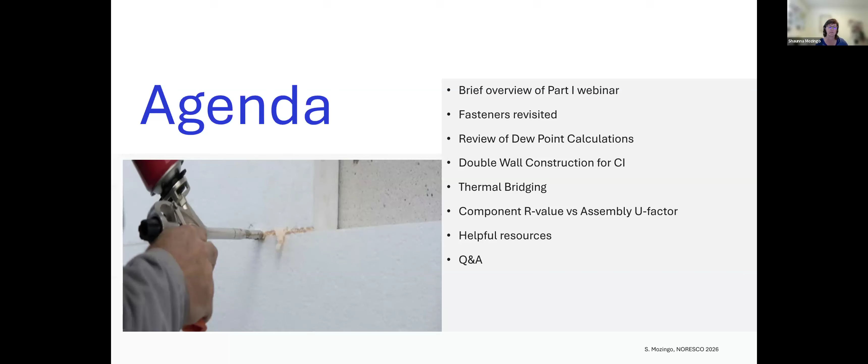Let's get just a review, right? A review of last webinar, part 1. We're not going to go into too much detail on this. This is what you can look forward to in part 1 if you haven't seen that one yet. It's just why continuous insulation. And as I say continuous insulation, I just don't want you to picture in your head rigid foam board. That's one way of doing continuous insulation. There's a lot of different continuous insulation. I'm not here to support one industry, right? I'm just talking about continuous insulation as a code requirement and as a code option.

So definitely energy efficiency. We can see the energy efficiency, the thermal bridging that takes place, the thermal benefits, holding the heat inside the house if we're trying to heat the house, keeping the heat outside the house if we're trying to cool the house.

Right, code compliance, whether we are doing a prescriptive R20+5 or if we're doing a trade-off path where we're going to get more benefit for having that continuous insulation on the outside or the inside of the wall. Thermal bridging, we're going to talk about in some more pretty good detail today because that was requested. So I'll just leave that up there. Reduce moisture damage, improve building durability. We're going to talk about that as we get into vapor and dew point and that sort of thing.

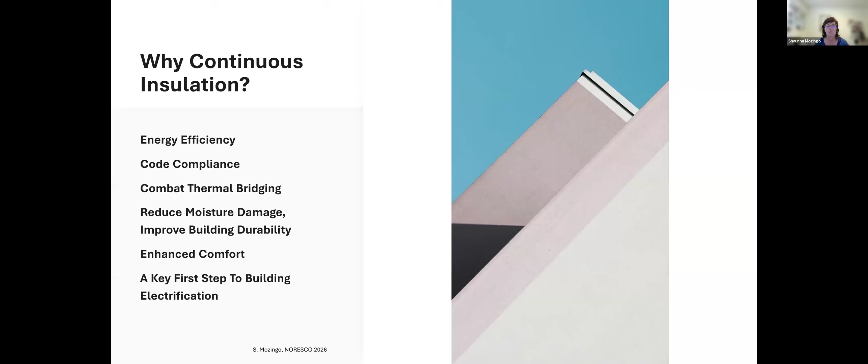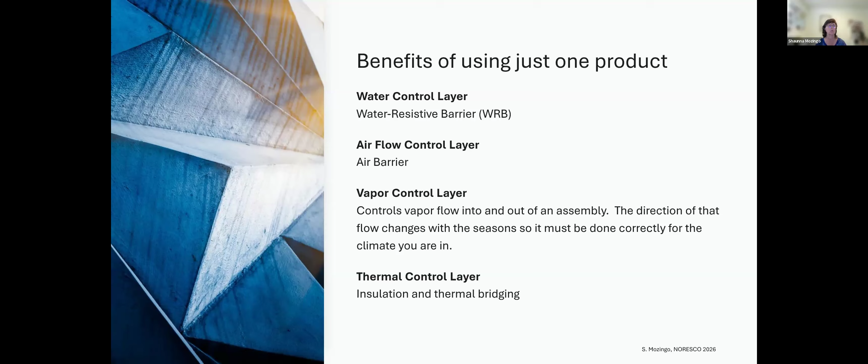So those are some things that we touched on in the first. The second is this idea of using one product or one thing for multiple benefits, right? This is more in line with rigid foam board type of materials, but you can have one product be your water control layer, your water resistive barrier, your air barrier, your vapor control layer, and your thermal control layer, doing that insulation and thermal bridging. So we talked a lot about that, and I like to bring that back around because a lot of people say the cost of continuous insulation is too much, but when it can take the place of 4 different things, you have one product that's serving 4 purposes, if installed correctly, of course, then maybe that takes away some of that cost conversation.

I also wanted to bring this back. We talked about all the different kinds of continuous insulation, and somebody had submitted a comment that I had my R values incorrect. So for XPS, the extruded polystyrene, it's R5 per inch, EPS at 4.6. I had all of these R values listed, and somebody said maybe check them out. I went back to each of the manufacturers and to the different products, and these are the values that I'm finding consistently. So I would love to hear from you if you're seeing something different than an R5 per inch in XPS average. This is about an R4.6 per inch in EPS, and about an R5 in the GPS, polyiso 6.5 to 7, and then 3 to 4.3 in mineral wool.

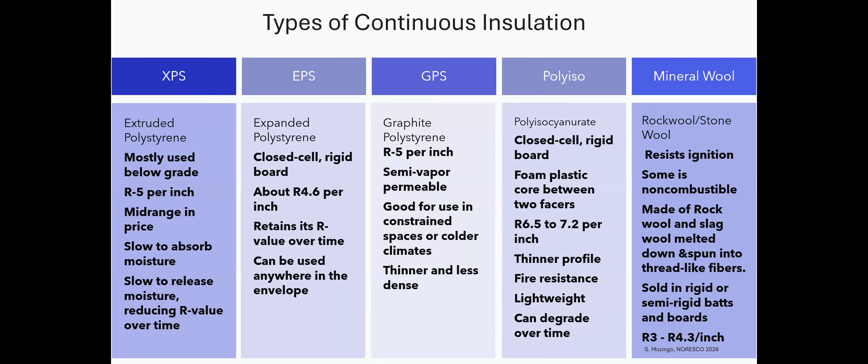Yeah, that's great. So remember, and I didn't go through these in detail this time because it is in part 1, but so there are some problems like when you talk about XPS and then I think it is GPS, where it's slow to release moisture. So it works really good for a while, but it holds its moisture and it's slow to release it. So it degrades over time. And what we're finding is that the manufacturer warranties don't last as long. And so they won't warranty for 100% of the R value over time. They reduce it, they decrease it over time.

So that's for XPS. EPS, though, retains its R value over time. So if you're seeing EPS in the foundations, that's great, right? It does retain its R value over time, and it can be used anywhere in the envelope. So I think if you're seeing EPS, that's a good insulation to see. I'm sorry if in the first one I said EPS didn't, because it's mostly XPS and GPS that sometimes lose their value over time.

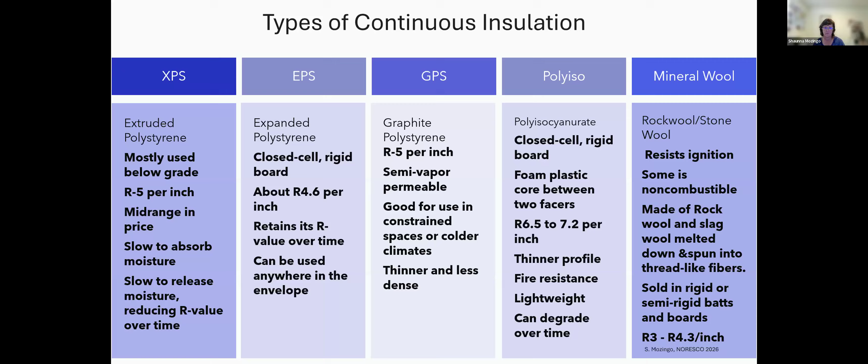All right, so some other ways of continuous insulation, double walls. We're going to talk about that because we had a couple people ask for double wall requirements. So we're going to look at that.

Batts, yes, you can have batts be continuous insulation. Remember, it's not the type of material, it's how it's installed. You can have a batt hung on a wall continuously, like you see a lot in basements, right? Or sometimes in crawl space walls. And so that would be a continuous insulation of a batt versus a cavity insulation where it's installed between two framing members. So, yes, you can have batts done.

Spray foam, a little bit harder because you're going to have a cavity, at least you're going to fill the cavity with the spray foam. And then in order for it to be continuous, you would have to go over the top of that framing. And that's going to be a little bit harder to do, especially if you're trying to close something in. So spray foam is probably one of the insulations that I don't see used continuously in a lot of places, maybe in an attic.

Wood fiber board, we're starting to see some of that as we get into more sustainable types of construction, where it's just taking these wood fibers, these chips that are left over from lumber production, and refining them into a fiber, adding some borate, which makes it a flame retardant, resistant to mold, mildew, those kinds of things. So we might start seeing a little bit more of that.

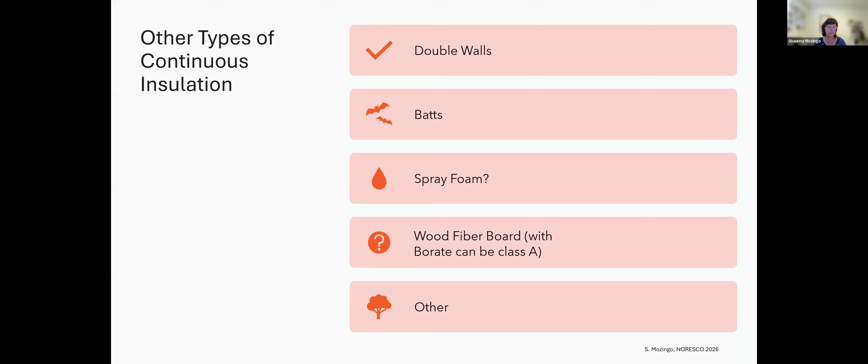And then what are some other things? Some other things might be SIPs, right? Structural insulated panel wall construction. We can see that sometimes used as continuous insulation values. We can also see insulated concrete forms where we have the insulation and then pour the concrete in between, but with some plastic, usually plastic or less thermal bridging type material used in there. And so you can have continuous insulation. There's a lot of ways to do continuous insulation.

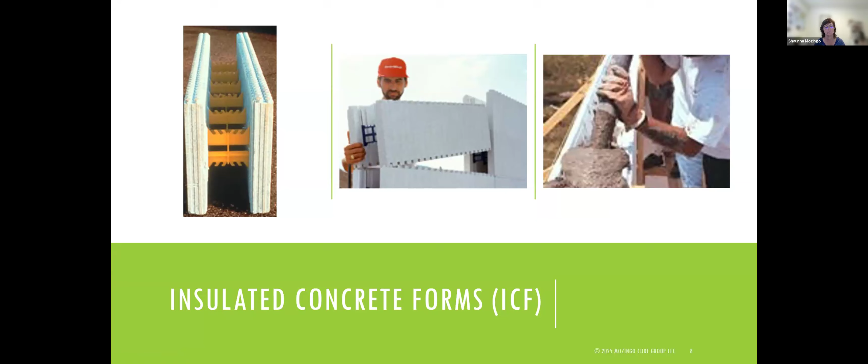One of the problems that I see often is when people say, well, I don't want to do continuous insulation, mostly thinking of rigid foam board, right? On the exterior, I don't like all those details, it's hard to install. There's some things out there I just want to remind you of. In the 2024 IRC, the residential code, Jay Crandall, a consultant who worked for a lot of people, he and the American Chemistry Council got together, and with somebody, Rob from DuPont, they put in this proposal that made it into the code.

It's in Appendix BN, which is this extended plate wall construction. Even Jay will tell you there are a couple things we need to work out, but it was a good place to start to give you the idea of how you could construct a house with continuous insulation.

So basically this concept: you have to have a double top plate. For sure it's limited to 2 stories, 1 and 2 family dwellings, townhouses, no more than 2 stories above grade, and seismic design category A and B. So there's some limits, but basically I have a 2x6 plate and a 2x4 wall, and then I have a couple inches of insulation. It's a 2x6 wall, but with only 2x4 construction and then the insulation.

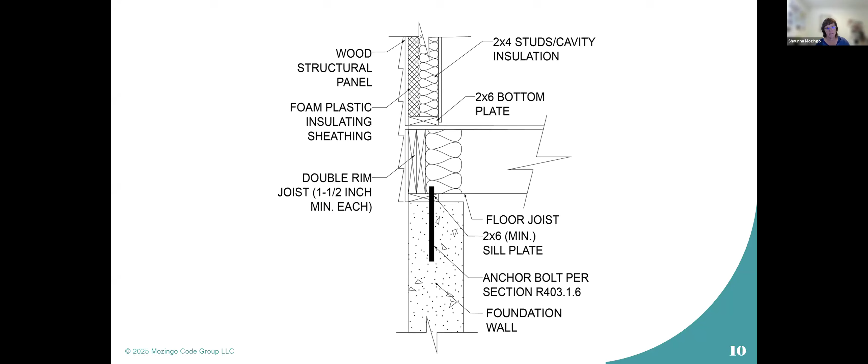The other question that came in was not necessarily a question, just a statement: can you go in a little more, can you cover the fasteners again? What's allowed and what's not allowed?

Well, you can pretty much do anything. It's just, can you call it continuous insulation after you're done? We look at the definition in the code of continuous insulation: it's insulating material that is continuous across all the structural members. So it's not in a cavity. You have framing and you install the insulation continuous over it or over the top of your concrete walls. It's continuous across all the members without thermal bridges other than fasteners and service openings. It's installed on the interior or the exterior.

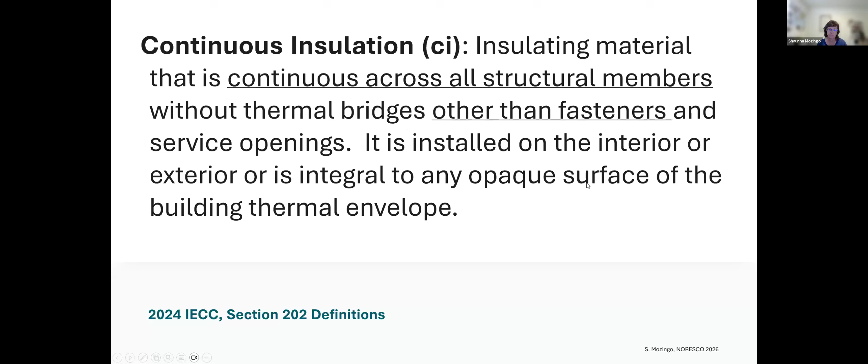So then we get into this: what is a fastener? A fastener is like this point thermal bridge. You might have some thermal bridging right here, but it's just a small point. Overall that gets calculated into the U factor of this wall when you put something into ResCheck or ComCheck, it's calculating the small thermal bridging effects of fasteners. So it's a nail or a screw or a clip or a bracket or maybe like this hat channel. I have this small thermal bridge here, whether I'm going through my cladding, through the insulation, into the framing. This is metal framing, just as an example. I'm going through something at a small point, it's not hugely continuous.

Or I have a hat channel in here where I have my insulation. I'm attaching my insulation to the framing. I put my channel up and even though this is metal, I have my cladding going into the metal, but I don't have a continuous bridge from the cladding all the way through to the insulation, because they're being connected at different points.

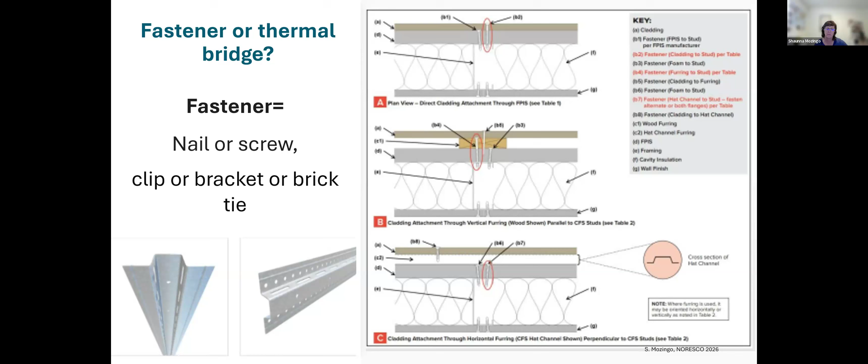So a fastener or a screw, while it is a point thermal bridge, is allowed when attaching your product and it can still be called continuous insulation because you're limiting the amount of that thermal bridge, versus something like this where you have a linear thermal bridge for cladding supports like these Z channels, that form this line all the way up and down the building. So now you have this linear thermal bridge: a continuous metal or wood furring that penetrates the exterior insulation layer, creating a cavity.

Something I just want to point out, which I didn't last time, is that a lot of times I get questions from people saying the jurisdiction turned me down for my ComCheck or my ResCheck because I used these Z channels, or whatever you want to call them. They're saying I can't count that. How do I do this in ResCheck or ComCheck? Well, you can't. If you're familiar with ResCheck, I just talked to Rob Salcido with PNNL this morning to make sure.

If you're familiar with those softwares, it allows you to enter a continuous or a cavity, but it doesn't allow you to enter two cavities or two continuouses, right? And so what you would have to do is call it other, if you had a cavity plus a continuous. If it was just cavity, if the only thing you were doing was this insulation on the outside of the building, then you would call it a cavity insulation and you'd just give it the R value for the cavity insulation.

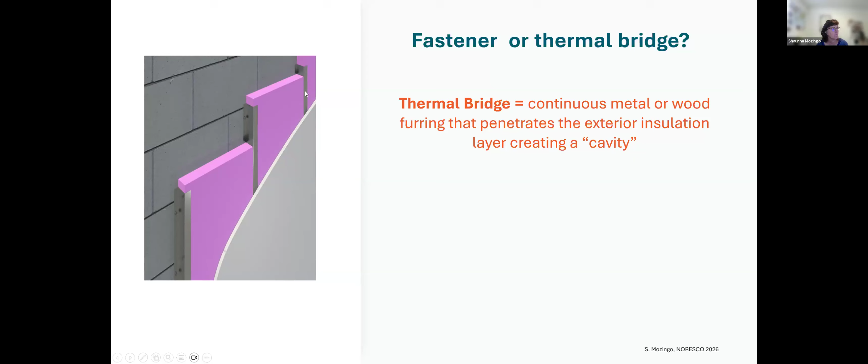So I think for now, if you're seeing this kind of insulation on the exterior of your wall where it's making a cavity, you would need to use other in ResCheck. Otherwise, just go performance; that would be your best bet.

All right, so also reminding you that the IBC does cover fasteners, telling you that Z-furring penetrating through exterior insulation makes it cavity insulation. It's not just an energy code thing. It's not just an insulation thing. The building code also talks about it. And there's more information at continuousinsulation.org, which, you know me, is one of my favorite websites. They have so much information there.

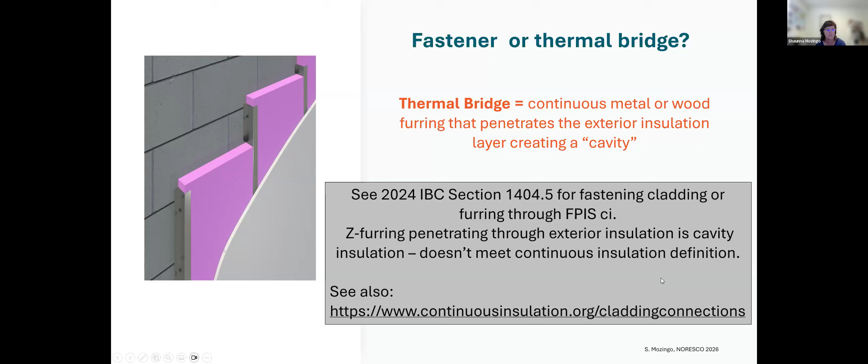So if you want a really detailed report that the foam sheathing folks put out on fasteners, there's this great report here. You can take a picture of this, or it'll be in the resources that I send out. They did a good detailed report on the different kinds of fasteners, the different kinds of thermal bridging that happens, how to calculate that into the U factor of your wall, and that sort of thing. I don't really have a ton of time to go into it.

All right. The other thing that I did find interesting was just a reminder about tapes. If we're going to use this one product, say a rigid foam board, as a continuous insulation and a water resistive barrier, air barrier, vapor barrier, all of the things that we want it to do, you have to seal all the joints and seams. And different manufacturers of different insulation call out different tapes or different things.

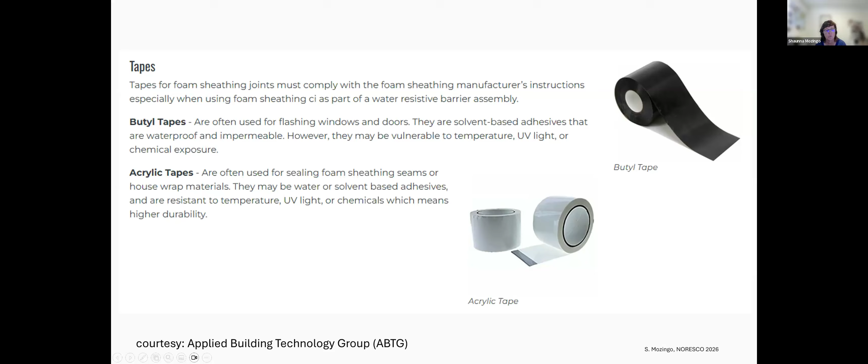I see a lot of black tape when I'm going around, and this is in that same report on the fasteners, but it was interesting to see that those butyl tapes are vulnerable to temperature, UV light, and chemical exposure. And so the better tape is acrylic tapes that are resistant to those things. So again, more information there, but just something to point out. Let's talk double walls real quick.

Double walls is a way of doing continuous insulation, right? So wherever we have wood, we have about R1 per inch. And so we put continuous insulation over the top of that to not have such thermal bridging right there, wherever the studs are. And so how do we combat that? Well, we can put that continuous insulation, or some people are not wanting to use continuous insulation for various reasons. And so some people will build double wall systems.

There's a couple different ways to do double wall systems. There's a bunch of different ways, actually. But one of the ways is to build, like, I have an interior structural wall, and so I build a secondary exterior structural wall. In this picture that I got at Building America Solution Centers, good resource, they have cavity insulation on the interior wall, cavity insulation on the exterior wall, but also a layer of rigid board or a layer of continuous insulation, right?

And so that continuous insulation is taking up the thermal bridging that would have happened between all of these wood studs. Or you could do it the opposite: you have your structural exterior wall and a non-structural interior wall, but you have a layer of continuous insulation in there. Another way to do it is to have your framing lined up so that you have double walls, but you offset them. There's a bunch of different ways to do it.

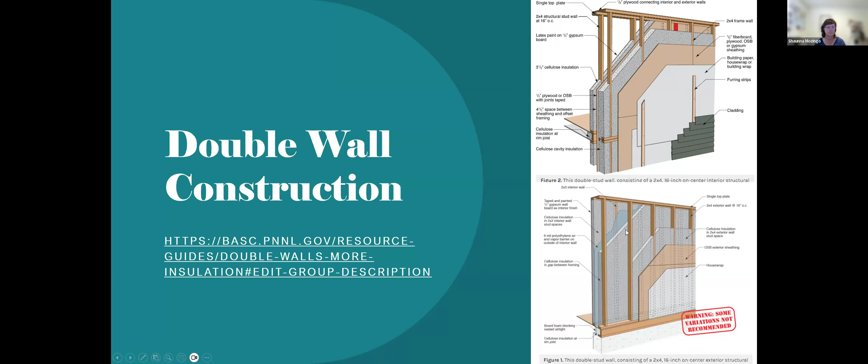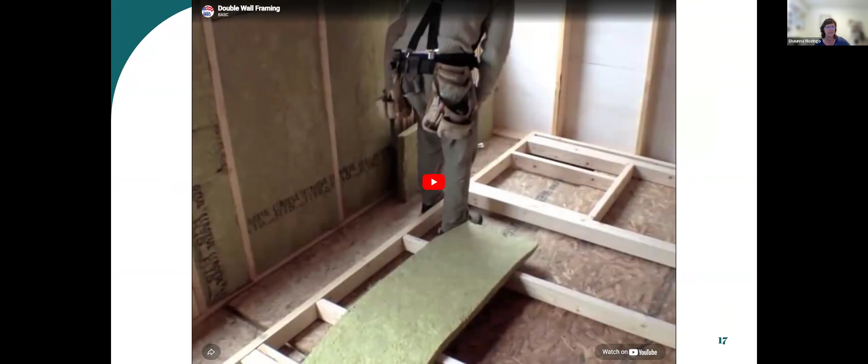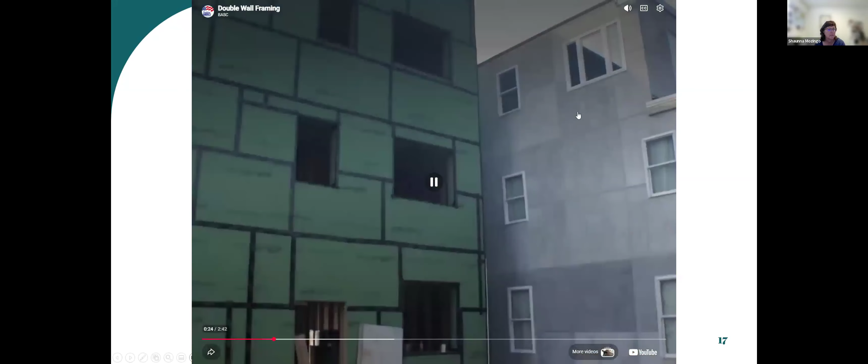I have this really amazing video that I'm going to play for it, but I don't think you're going to get sound. We were testing it earlier. Maybe I can talk to you a little bit about it. So this is a cool video from Building America that I found on Building America Solution Center with a good process of insulating. You can't hear this, right, Erica? I can't. Okay, that's fine. He's just explaining this double stud or double wall system that they're using, and I will narrate for you as we go through.

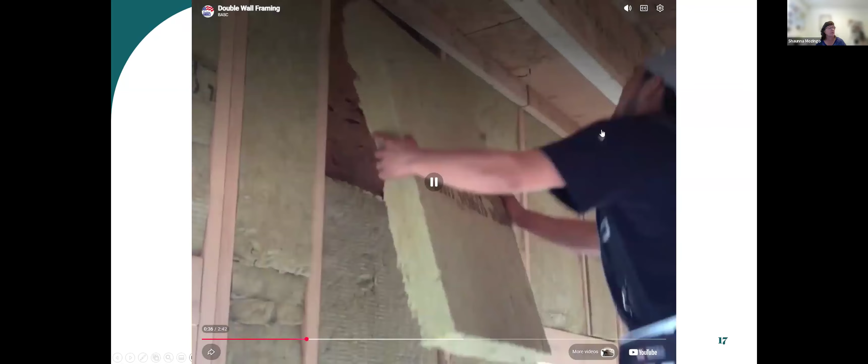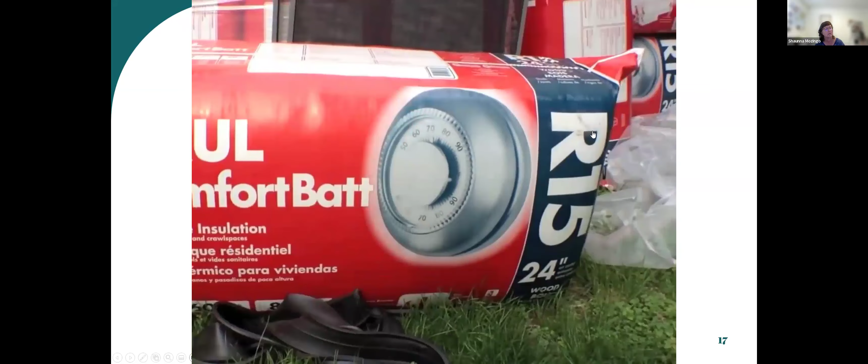So let me get inside the wall. There you go. So what they're doing is taking some rock wool insulation and insulating this exterior structural wall, insulating the cavities with rock wool, which is about an R15. This is an old video. Then they take a 2-inch thick layer of rock wool and add it continuously on the inside of that wall. So now you have a cavity plus a continuous insulation, and so you break up all that thermal bridging.

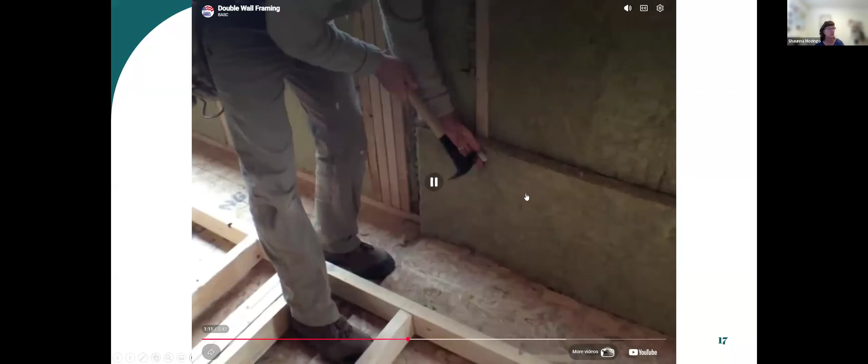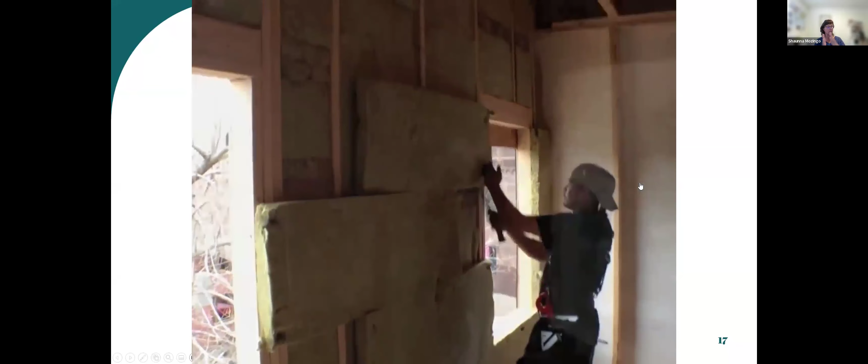I'm just waiting for them to get a little further here. Sorry. So the middle layer is probably the most important layer of the wall because it mitigates that thermal bridging. And you can see rock wool being used is going to be a good way to deal with your wildfire.

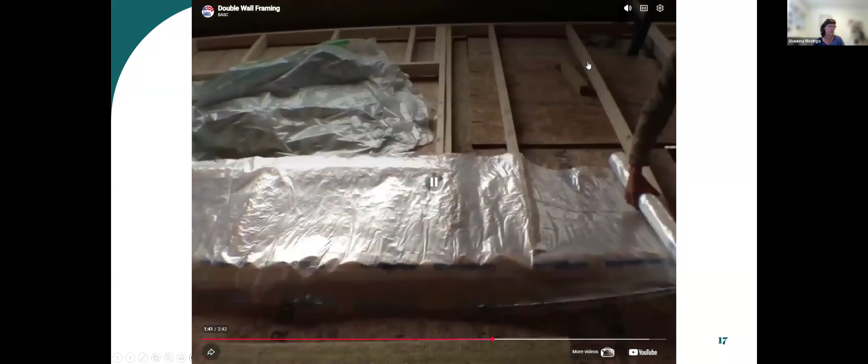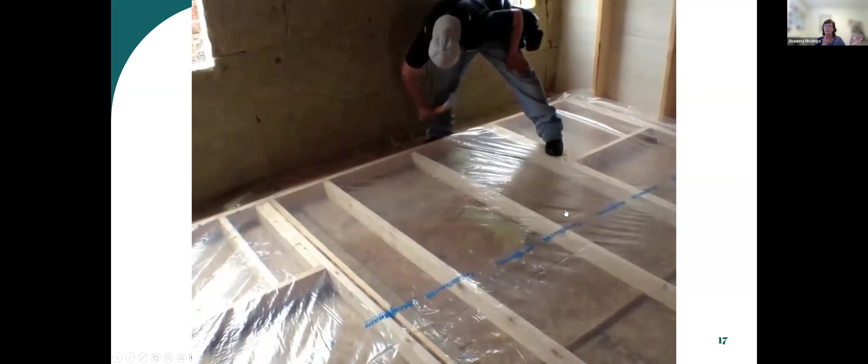Then they use a smart barrier. So this is like your vapor retarder, but they're going to put it on the interior non-structural wall, on the exterior side of that interior wall. So you have this smart barrier that, depending on the time of year, will let the vapor out if it gets in. So that's kind of a cool thing to do. If you haven't seen those smart barriers, I would look at it.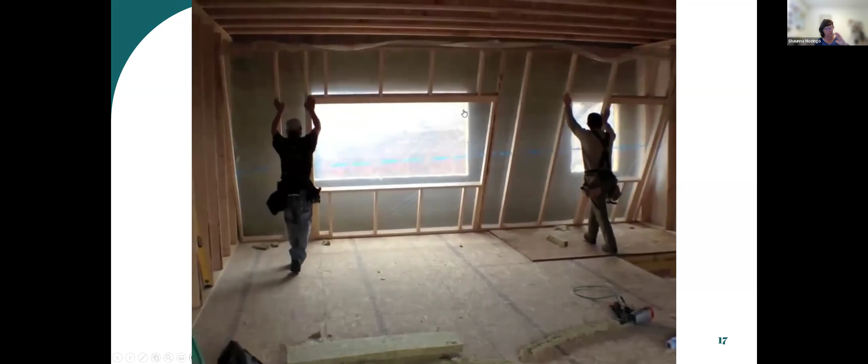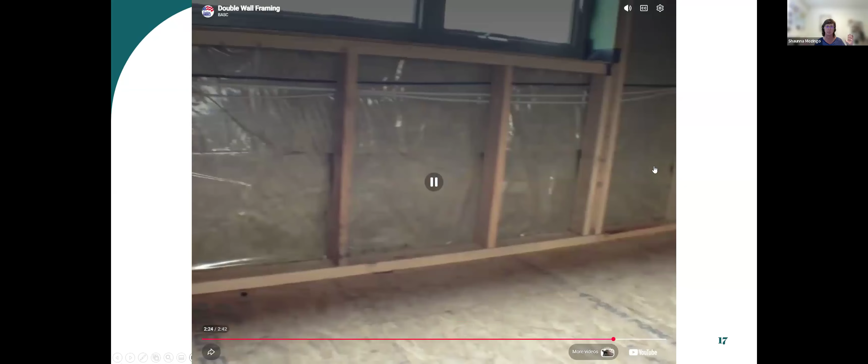So see, you have this interior wall, and they stand it up next to the exterior wall, and now you have a cavity insulation, a continuous insulation, and your vapor and air barrier. And then you have an interior wall that all your plumbing and your electric can be installed in. And so that's nice because then you don't have to worry about any penetrations to your thermal envelope.

So that's another way to do double wall systems, as opposed to this one, where I have this double wall, I've offset the studs, with a structural wall and then an interior wall. But I have no vapor barrier, air barrier, or room for a continuous layer of insulation inside there. So maybe not the best way. The best way is to build that structural wall, get it all done, and then put your interior wall in if you're going to do it that way. So there's a bunch of different ways to do it.

Somebody just asked if I would cover some of those, and I think that if you want to go to Building America Solutions Center, there's a lot of great information there. The National Association of Home Builders put on some really great videos on how to do double wall systems too, and count it for continuous insulation.

So that's another good resource for you.

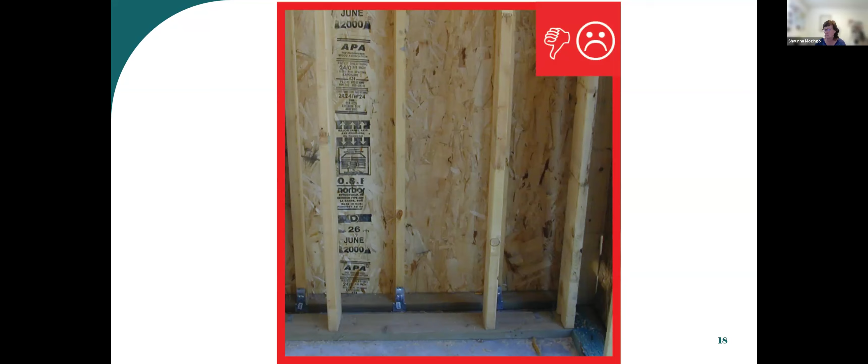What do we have? Do you calculate EPW construction similar to standard exterior insulation, where the insulation covers all the exterior sheathing surfaces? So there's a question. I'm going to cover it right now because it's in here, right here. Extended plate wall construction. Do you calculate extended plate wall construction similar to standard exterior insulation, where the insulation covers all the exterior sheathing surfaces?

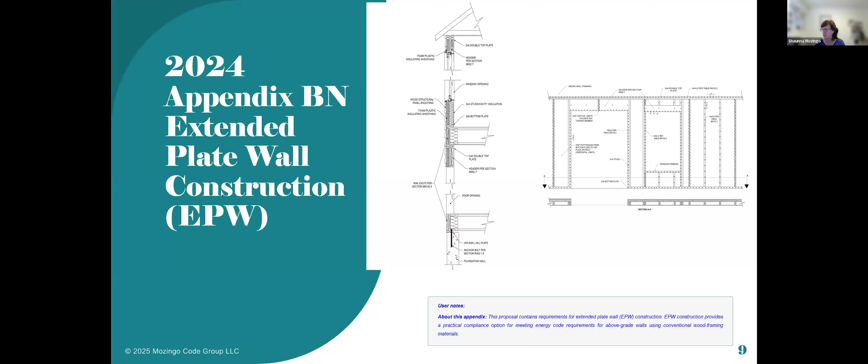I would imagine so, because it is continuous insulation on the exterior. You have a cavity plus a continuous. Maybe I'm not understanding the question for sure, but you have a cavity plus a continuous, so you would be able to count that exterior one as continuous insulation. No, not 100%, because you have a 2x4 stud wall, and then the continuous insulation. So that insulation is covering all those studs. I don't know if that's what that question is meaning, but that's how I'm taking it.

All right, let's go through here real quick. So do you end up with moisture in assemblies? Let's talk about this real quick, because this seems to be one of the biggest questions and concerns from last time. I talked about how you need to calculate your dew point, but I didn't show you how to do it, or the who, what, where, and why. So let's talk about this, right?

We have these walls, and we have a lot of things that we're worried about in those walls. Why do we need these barriers, vapor barriers and weather resistant barriers, and air barriers? We want to control rain, right? We're going to control water intrusion. That's like a sprinkler or rain or whatever. That's easy to see, and we can picture how we're going to control that. We want to control air leakage, right? We have to have a continuous air barrier. Wherever air can get into the assembly, so can moisture. So we want to control air for multiple reasons in the code.

Then we have to control our indoor relative humidity, right? We do that through mechanical ventilation, different ventilation strategies. Maybe in certain climates, we have to add some dehumidification. Control construction moisture, right? Make sure that your building materials are dry before they all get enclosed. So we want to make sure that we're doing that.

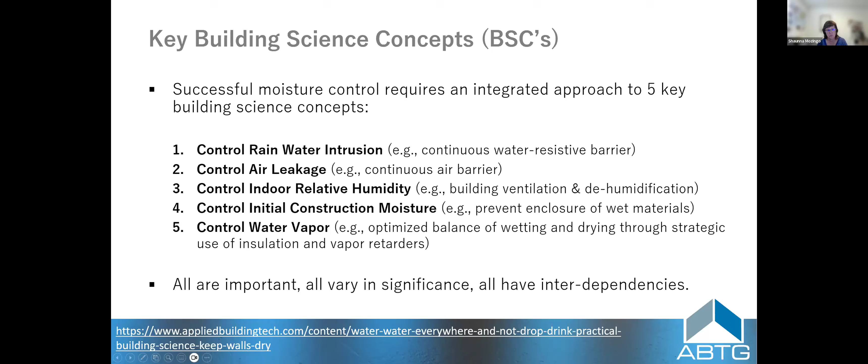So I love Construction Instruction. I think I talked about it last time, constructioninstruction.com. They have a great website. They have a free app that is amazing that you just download on your phone, and it shows you how to do windows, how to do walls, how to do everything, and how they're testing anything moisture, vapor, thermal. Construction Instruction is great.

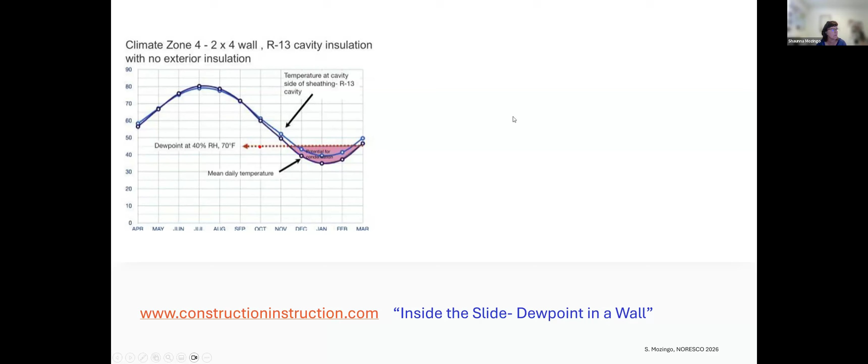Justin there had put out this great way of telling this. I got their permission to walk you through it. So this is for climate zone 4, but the concept is the same across climate zones, right? We have this wall. We have this idea that if you insulate a wall, it reduces the heating and cooling costs in a building, which it can if it's done correctly, and that it makes your building more comfortable. It can be done, right?

But the reality is that most of the time we have too little insulation or too many leaks, and so moisture can get into the building. So what we're trying to do is look at how we put a wall together, and see if all the layers are done correctly, and does it handle moisture, vapor, air, all of the things that it's supposed to be controlling. So we do what we call a dew point calculation, right? If it's hot outside and I'm cooling my house, or I'm heating my house and it's cold outside, when hot meets cold, moisture is going to happen, right?

Take that ice cold soda out of the cooler and put it on the counter, and you're going to start seeing the moisture on the outside of the can, right? When the hot meets the cold. So what we're trying to do is figure out how to move that dew point so that it's not right smack in the middle of the wall, ruining the insulation and ruining the framing.

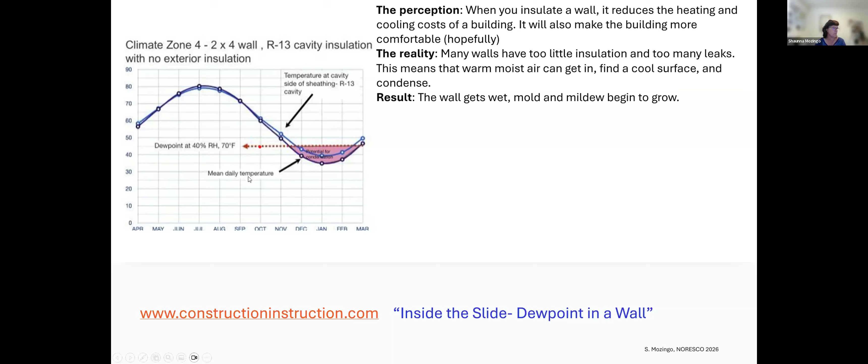How do we do that? It's taking your climatic design parameters for your climate, right? And making sure, what are they? What is your mean daily temperature? And how are you going to build your wall, right?

So if we look here, let me put this up here. This graph illustrates the potential for condensation and where it can occur for your wall. So the dark blue line is your mean daily temperatures. This is telling us that from about November to about March, we drop below this dew point, so we have the ability to get condensation in our walls during these months.

And then the light blue line is how we built our wall and the temperature of the wall. This example is a 2x4 wall with R13 insulation. So I have this R13 insulation in my wall, but that's still not warm enough to where I will not get condensation.

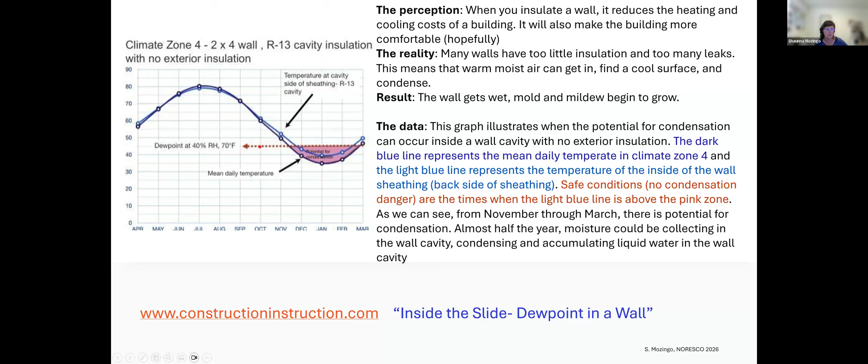So from about late November, early December, all the way to mid-February, I'm going to have condensation in my wall because I didn't add enough insulation to bring it up above that dew point. So what that's telling me is I need to add a little bit more insulation or build a different wall.

So you take that same wall in climate zone 4, R13 2x4 wall, and add an R5. That's just enough to keep me above the dew point. So now my condensation is going to be condensing out in the air somewhere, not in my building assemblies. That's what the dew point calculation is.

The code is not going to get into this. Can you imagine the code book if we had to design everything? We're not in the design phase. This is really a designer's requirement to calculate their walls and make sure they're putting it together correctly. The code is a minimum, but there are so many different materials and so many different ways to construct a wall, we could not make a code book big enough to cover every single scenario.

So we have to let the designers figure out what they're using. Now you go calculate the dew point of this wall and make sure. Right now, if I'm in a colder climate, this is climate zone 4. So if I'm in a 5, 6, or 7, I'm probably going to have a bigger curve here, and I'm going to need a lot more insulation to bring the same thing above my dew point. That's what all these calculators are out there for.

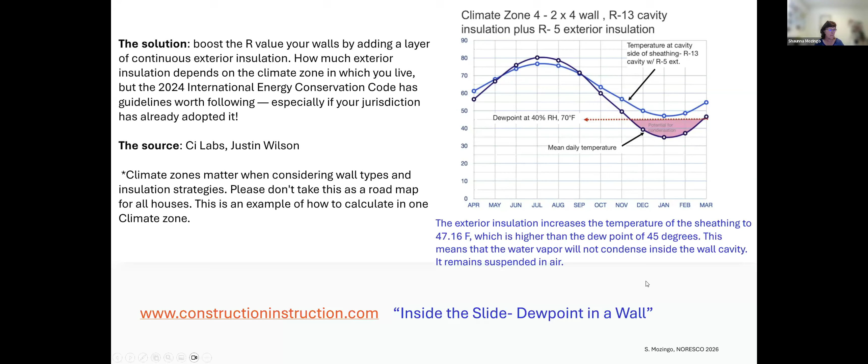There's a bunch of them. There's Applied Building Tech, Construction Instruction, Building America Solution Center. All of these places, and these are just a handful of them, have a dew point calculator. You tell it how you're building your wall, what climate zone you're in, what's your outside layer, what's your inside layer, what your framing is, and it will calculate the temperature of that wall and where that dew point will lie, and whether you're safe or not.

That is something every designer should be doing. It's not up to the code official to do that for the designer. We're not supposed to be designing these buildings as code officials. In fact, the code tells us we're not allowed to. So we need to make sure that's happening, because we have more and more materials and more ways of doing it. The code provides tons of options, and we want to keep that flexibility, but that means this is going to be more reliant on the designer to go figure out what's going to work and what's not.

There's also this great series by Joe Lstiburek with buildingscience.com. He put out a great series of videos on how to build the perfect wall. I think a lot of people have heard of that, how to build the perfect wall. He talks about how every single layer goes together, thermodynamics, moisture flow, everything, for residential walls and commercial walls and all of that.

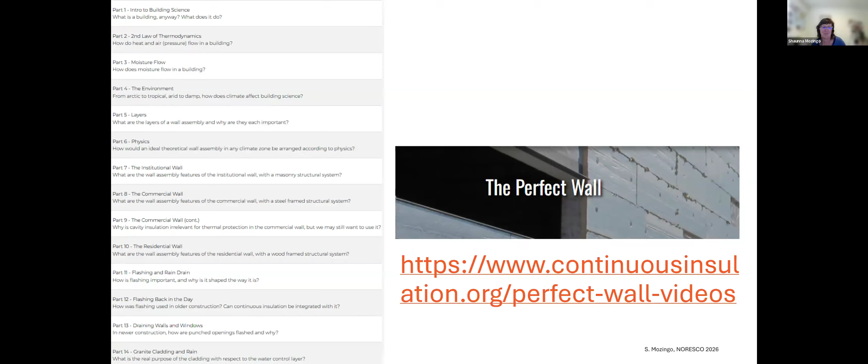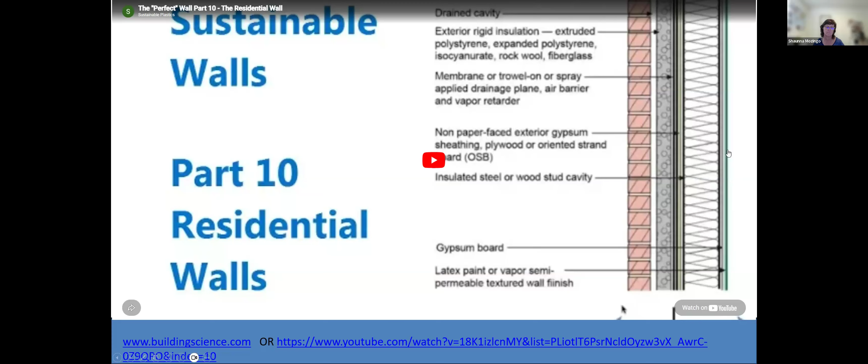In order to get everything out of the video, you need to be able to hear Joe's voice, because he's comical most of the time. But he goes through this: it doesn't matter what your insulation is, whether it's cavity insulation or continuous insulation. What matters is how all the layers go together and that they're installed correctly, and that you have all your barriers intact—your moisture barrier, air barrier, vapor barrier, water resistive barrier, thermal barrier. Making sure they all go into place is what matters. You don't have to say this is the best cavity insulation or this is the best continuous insulation; it depends on how they all go together. So it's not product specific, it's application specific. We won't go into that.

All right, let's cover thermal bridging real quick. Let me look here—will you cover the ratio of external insulation to internal insulation and how it's related to dew point? I can't cover that too much. If you go into those calculators, it's going to depend on where you're at, the temperature, your relative humidity, all of that, versus how much cavity insulation and how much continuous insulation it's going to take. There are too many variables, right?

What is my framing—2x4, 2x6, metal, wood, concrete? What am I doing, where am I doing it? To get that ratio, that's going to be up to the designer, and you can go into those dew point calculators and put in what you want to do and play around with it. Like I always say, if you're going to do something with a thermal envelope or go into ResCheck, play around and see how much adding continuous insulation changes your passing or failing, or how much cavity insulation changes passing. Do the same with your dew point calculator—get it to the point where you play around with it and figure out what will work for you. I can't get into a lot of that. Maybe that's a completely different webinar we could do, just for designers, on calculating dew point.

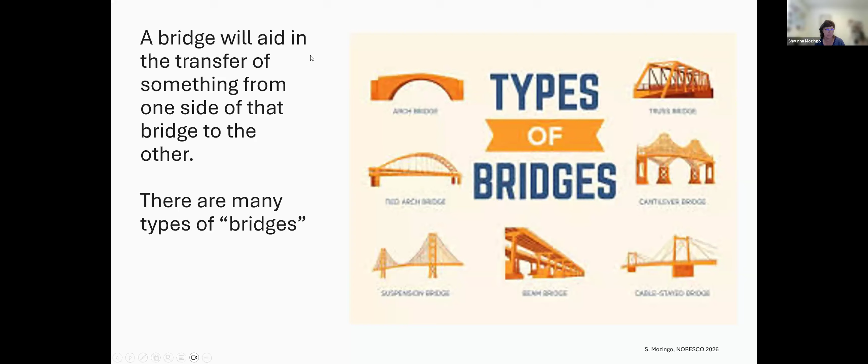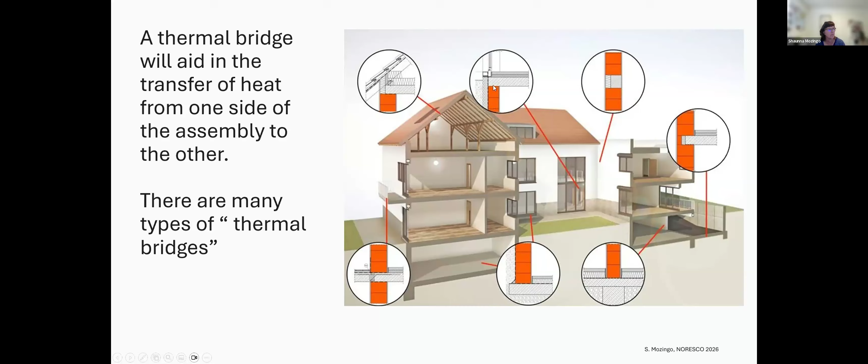It's a good idea. All right, let's talk thermal bridges. There's all kinds, just like there are all kinds of bridges. The whole idea of a bridge is to get you from here to there, to transport you from here to there. The same is true for a thermal bridge—it transfers heat from one side of the assembly to the other. That's a thermal bridge. There are a lot of places in our thermal envelope where that happens, and a lot of different kinds of thermal bridges.

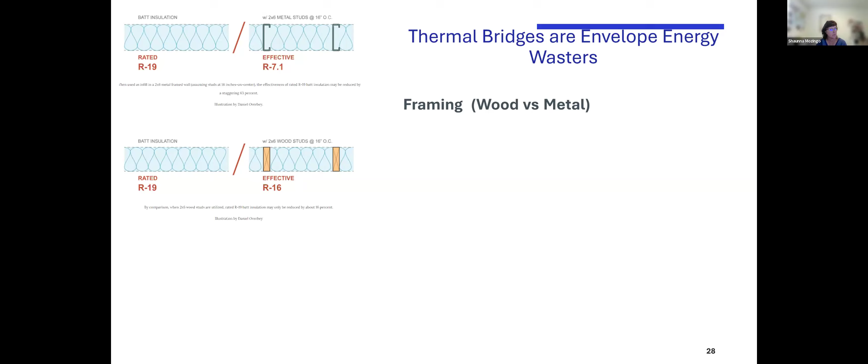Some things we need to think about: we take an R19 batt—it's R19 until we install it in something. Once we install it, we change the U factor or the R value of the whole wall. It's interesting to see that an R19, effectively, that wall is not R19. Effectively it's 7.1 when you put it between metal studs. There's a little less loss with wood studs, so it's effectively an R16 wall. Just because it says R19 doesn't mean it's R19. The code knows that when you tell it how you're installing it, like in a ResCheck or performance software, or in the prescriptive tables—we know if you're going to install it in wood, here's the value we need, because overall, this is what we're going to get from that wall. So it knows that going in.

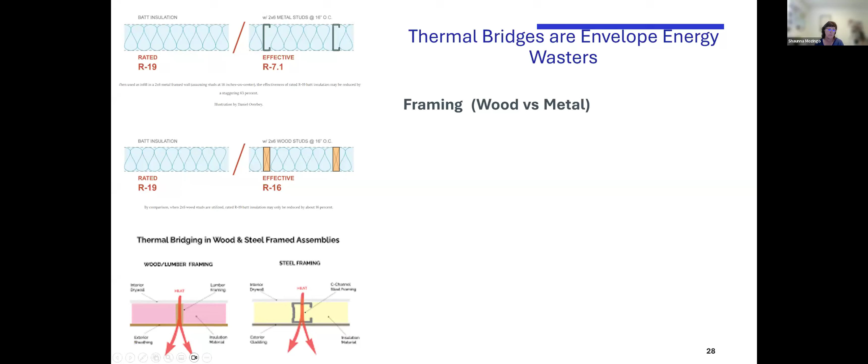There's a lot of thermal loss at that wood and at that metal when it comes to framing. It's amazing to see wood loses between 14 to 18%, and metal reduces the R value of the wall by about 63%. That's why in COMcheck, or in the commercial tables, whenever you have metal in the building, you have to have two layers of insulation. If you want to trade off one layer, that's fine, but you're going to have to do a lot, because you have to make up for not having that second layer of insulation. There's thermal bridging everywhere, and the code has started covering it in commercial thermal bridging—you have to calculate your thermal bridging. I have a lot of jurisdictions now that are amending the residential code to bring thermal bridging requirements in for residential buildings also, just to make sure.

I think this is a good example. I have this heat loss because I have this floor that has a thermal bridge all the way through to the exterior, so I have heat loss through my building. Whereas if I would have just put a thermal break right there, I don't have heat loss, I have heat. I want to pay for the heat, I don't want to pay for the heat loss, right? So the whole idea is, how do I keep the heat in the building if I'm trying to heat it, or out of the building if I'm trying to cool it?

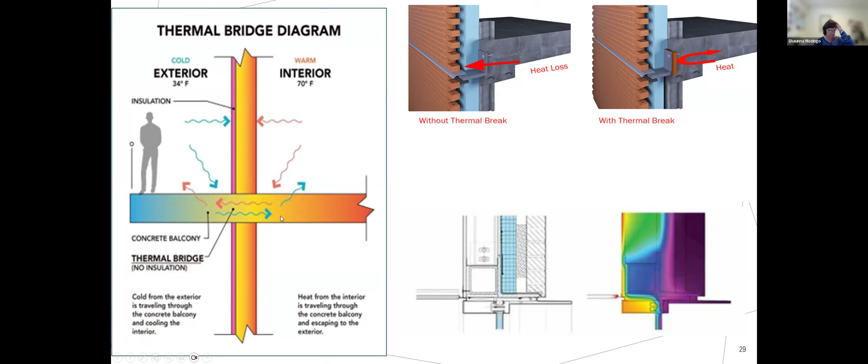A big portion of that is floors, but we'll look at a few different things. So you have different kinds of bridges. A linear one is some part, like a floor, that intersects the building and forms a line all the way across. It might be a line up and down, like a Z channel - that's a linear thermal bridge. It forms a line along the length of a building surface, usually associated with the intersection of building thermal envelope assemblies and components. They aren't accounted for in the U factor.

That's why you're going to start seeing more - that's why we had to start adding more things about thermal bridging in the envelope, because we weren't calculating the loss along this whole line of the building for our U factor. We calculate the U factor of the wall, but not the thermal bridge right there, so it's not counted for. That's why the code brought it in.

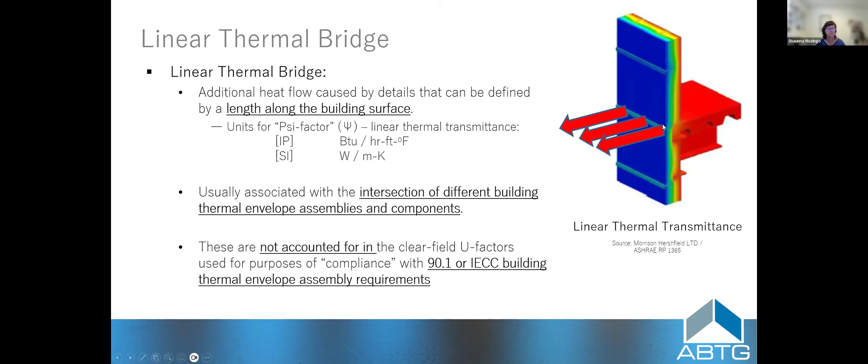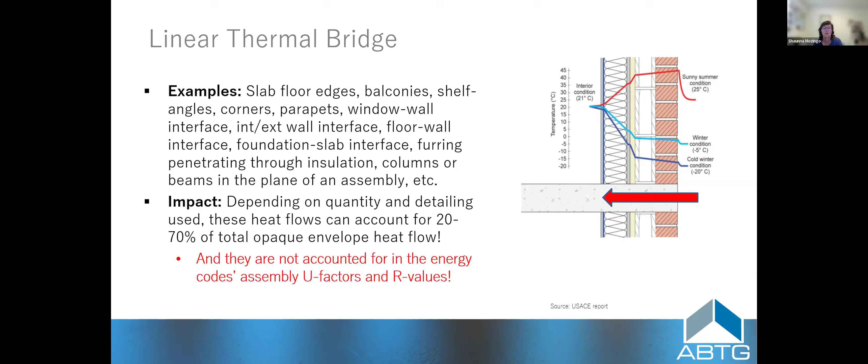Residentially, the code hasn't brought it in unless you've amended it. But it's good to know that you have this loss there. There are usually linear thermal bridges at slab floors, balconies, corners, parapets, window to wall interfaces, all kinds of things. It can account for up to 20 to 70% of the heat flow loss in the building - can you imagine losing so much? That's why the code is like, we've got to cover this.

So there's a lot of ways to mitigate that thermal bridge. One would be to have your floor stop at that wall and build a new floor outside of it. Don't have a balcony or a slab that goes all the way through. You're going to start seeing more and more of these places where you build separate components, right? Or there are a lot of different ways.

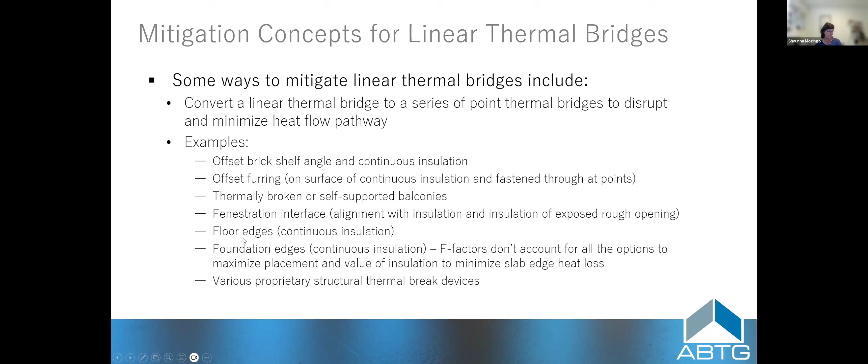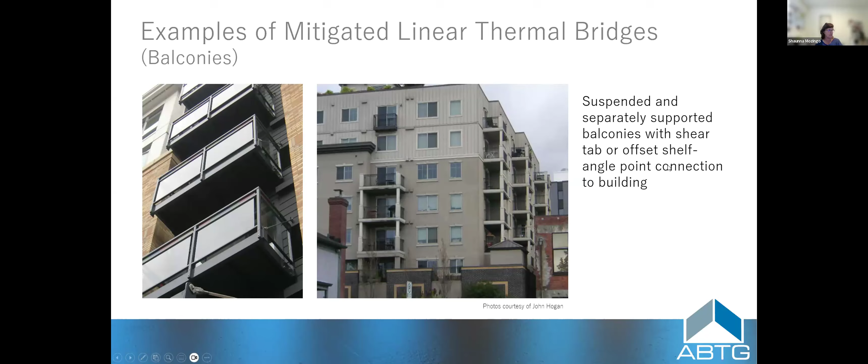You can put some continuous insulation. There are some proprietary things out there - let me show you a couple of things. You're going to start seeing suspended or separately supported balconies, instead of balconies that go all the way through. That's one way of doing it. You can see there's all kinds of different places that we have linear thermal bridges, and you're going to start seeing different proprietary things being made.

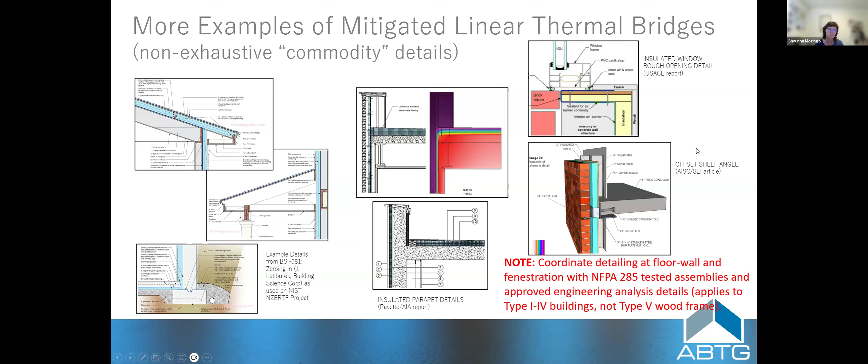Maybe thermal blocks - we start seeing thermal blocks, things like this, where you have these proprietary products with a block that's got some R value to it, or at least a thermal block. So if you insist on doing a continuous floor, you can. Or if you're going to have metal to metal, you can have a thermally blocked structural thermal block there. You can use materials that aren't solid metal but have low thermal conductivity built into them - there are different materials that can be used.

These are things that on commercial buildings you have to start identifying on your plans. But residentially, unless you're a jurisdiction that's amended it - like Aspen, Breckenridge, places like that have brought this in for their jurisdictions - it's not required. It doesn't mean just because it's not in the code doesn't mean it's not a problem, right?

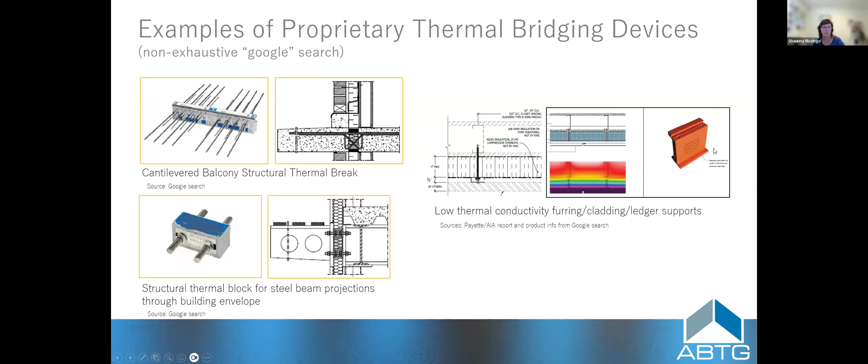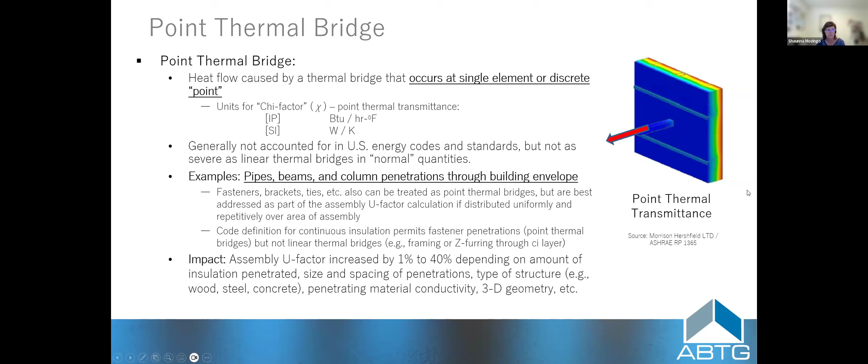And so you also have point thermal bridges, which occur at a single element or discrete point, like maybe a fastener, which is a small point thermal bridge, but it also might be pipes, beams, or columns that penetrate the building envelope. It increases the U factor from 1 to 40%, depending on the amount of that thermal bridge.

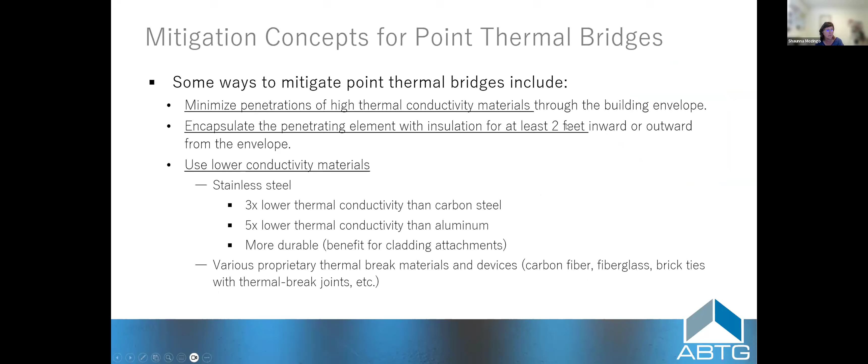Some ways to mitigate that is to reduce penetrations through the thermal envelope, or use low conductivity materials. Encapsulate it with at least 2 feet on both sides with insulation. Use better materials - there are some proprietary things. Then you also have clear field thermal bridging, right?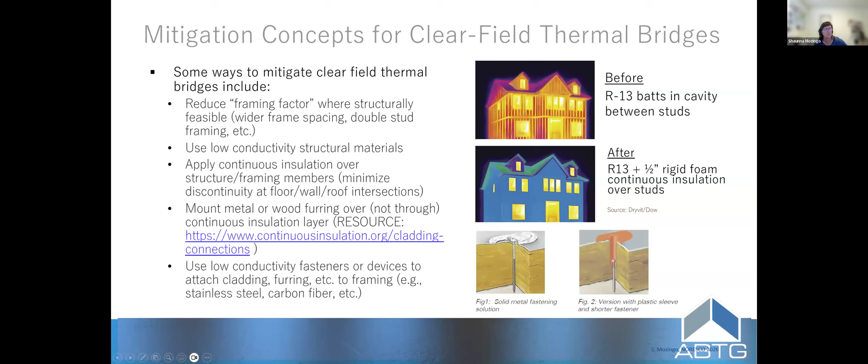And then they have a plastic sleeve using a low conductivity material for doing that. So there are different ways to mitigate all of these thermal bridges. There's a great resource at continuousinsulation.org where you can go in there. I love this resource—it's a design tool for steel walls or wood walls.

You go in and tell it what code you're trying to comply with, what climate zone you're in, what kind of cladding you're using, the R value of your exterior insulation, what kind of exterior sheathing you're using. It's calculating a bunch of different things—the performance, the thermal performance of your wall. My code requirement is this in this climate zone. Here's what I'm doing. I pass, right?

Here's my vapor control. It's calculating based on how you built that wall. Here's my vapor control—I'm not meeting a class 1. I'm not supposed to; it's not permitted, right? But I can use a class 2, and I'm meeting class 3, whatever. And it gives you a bunch of different ways. It's not necessarily calculating too much dew point, but it's a great resource at continuousinsulation.org.

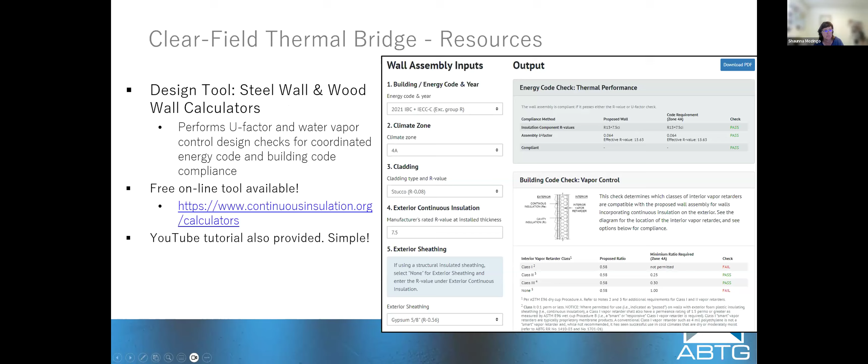This, I think we went over last time, but maybe not. This is just saying there's a difference between an R25 wall and an R20 plus 5. When you're talking about insulation and continuous insulation and the values of continuous insulation, you have to keep in mind that R25 just means I have an R25 batt probably in the wall, or an R25 cavity insulation in the wall. An R20 plus 5 means I have an R20 cavity, but a plus 5 continuous. There's a big difference by adding a layer of continuous, right?

This could be R25 and still have all this thermal loss. This is an R20 plus 5—that's very different, right? And so you can see if you calculated all the layers, the effective value of the wall, if it was just R20 cavity, it'd be 17. If it's an R25 cavity, it's R19. But an R20 plus 5 gives me an effective R value of R22, because I've mitigated the thermal bridging.

So it's huge. It's also why we need to shift from looking at just the R value to looking at all the layers of the assembly and what is our effective end result of that wall going together. Right, so some good points there.

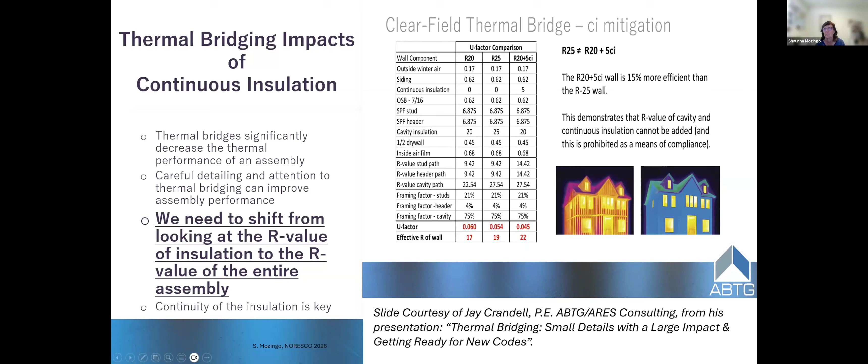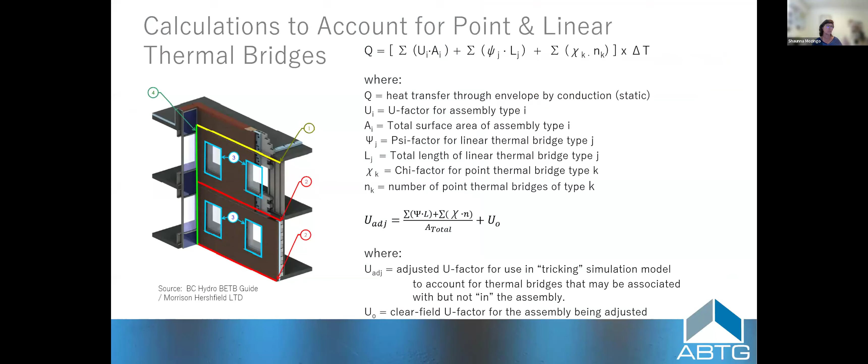All right, this is another great resource I wanted to get to you—make sure that you are going here. This is a good publication on thermal bridging in building, and it has a lot of great things in there, how to account for it if you want to calculate the U factor as part of your wall. If you're in commercial, it does make you account for that, and it gives you a calculation in there. And it also gives you all the different ways to mitigate thermal bridging at different places.

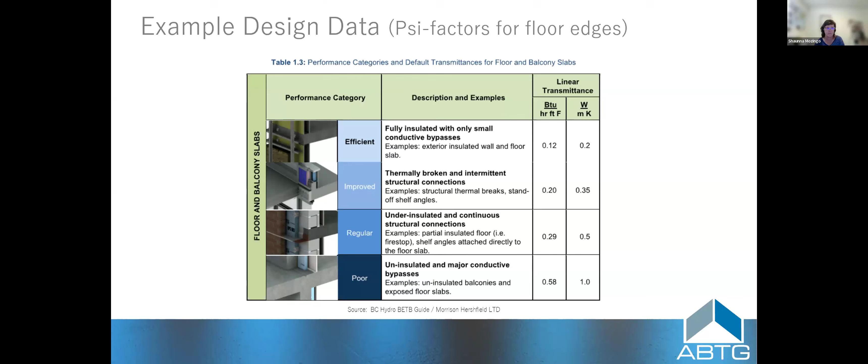It gives you great things like this—here's a bad way to do it, just to have a continuous floor through it. Here's a regular way that we start to see it. Here's a better way. Here's the best way, right? And it gives you that for floors, glazing transitions, or parapets—there's really good resources in there for you. Another good resource, probably one of the first ones that I started reading, was from Schock, the Guide for Analyzing Thermal Bridges.

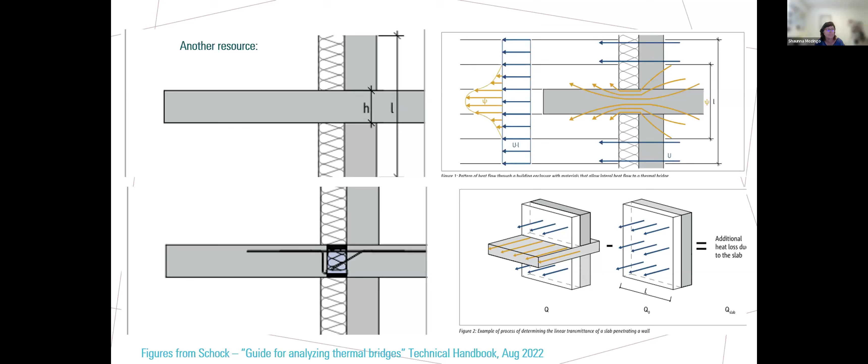It gives you a technical handbook you can download for free if you just Google Schock's technical handbook—it's a really good one too. There's a lot of resources out there. I'm trying to say, it would be hard for the code to cover it all, right? So you have to utilize your resources. There's a lot of R values out there prescriptively.

You can see we have a lot of different climate zones, and a lot of different prescriptive requirements. I would love to understand from you what you're seeing the most of. Are you seeing continuous insulation being used? If not, why? If we have time, type it into the chat, otherwise it would be great if you just email me. I would love to hear it.

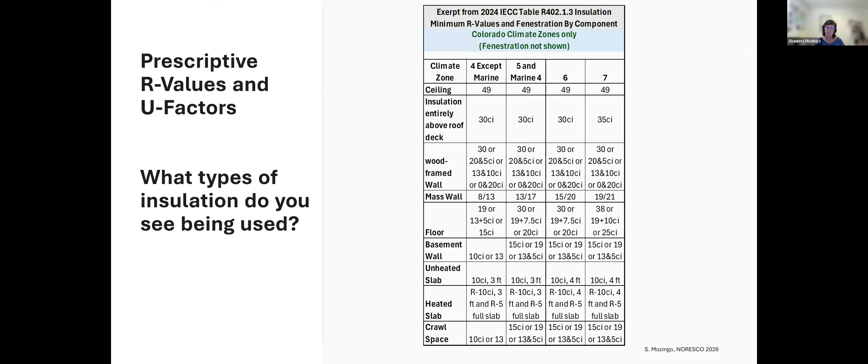I will go straight to the insulation industry. We did this a couple of years ago. People were saying we don't use it. Why? And they gave me lists. I had to go to the continuous insulation industry, the foam sheathing industry, all of them. They sat and listened to a one-hour presentation of why code officials or designers are refusing to use continuous insulation, and most of it was about resources and not understanding. And man, did they answer with their great, amazing continuousinsulation.org resource and applied building tech.

They came out with all these resources. So if you're still having trouble, I want to hear about it, because we can go to this industry and say, you've got to help us more. Here's some more things that we need that would help us do our job. So let us know what those are.

Buildingscience.com is great on showing you how all the layers should go together. Continuousinsulation.org, construction instruction, they have that free app you can download that's pretty cool, that walks you through all kinds of things. Building America Solution Center is another great resource. And a huge, great resource, as Erica mentioned earlier, is the adoption toolkit. It has so many resources in there, all our webinars, lots of how-to guides, checklists, and details for your plans, and all kinds of wonderful things. So please be sure you're checking out that toolkit.

I could probably talk continuous insulation all day, but that's what we have. I got an hour, and so there you go, that's what I have for you. I would love for you to email me here and let me know more of your concerns, questions, things that you're seeing, so that we can cover it more as we move forward.